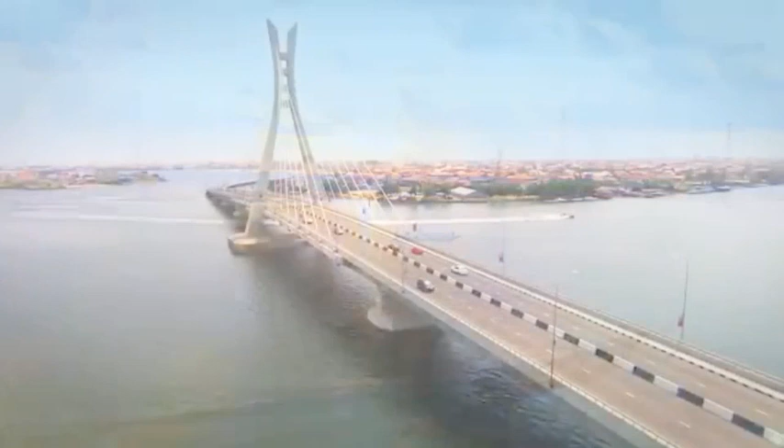The tropical hot city of Lagos is the largest city in Nigeria and sub-Saharan Africa. The city, with its 14 million people, is one of the fastest growing cities in the world and one of the most populous urban areas. Lagos is becoming a major financial sector in Africa and has one of the busiest seaports in the continent. It initially emerged as a port city that originated on a collection of islands.

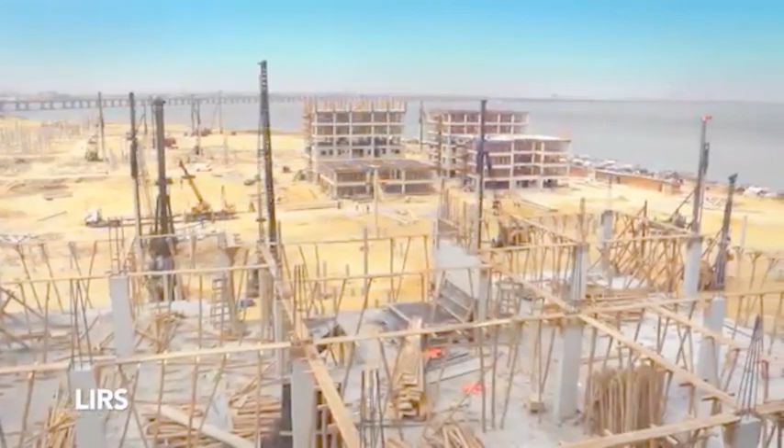Cities in Africa are predicted to see a high increase in their populations in the next few years, with Lagos on the forefront to hit record numbers. Nigeria's population is projected to double by 2050. Other predictions suggest this African city could be the most populated in the world by the end of the century, with Lagos' projected population by 2100 ranging from 61 million to an astounding 100 million.

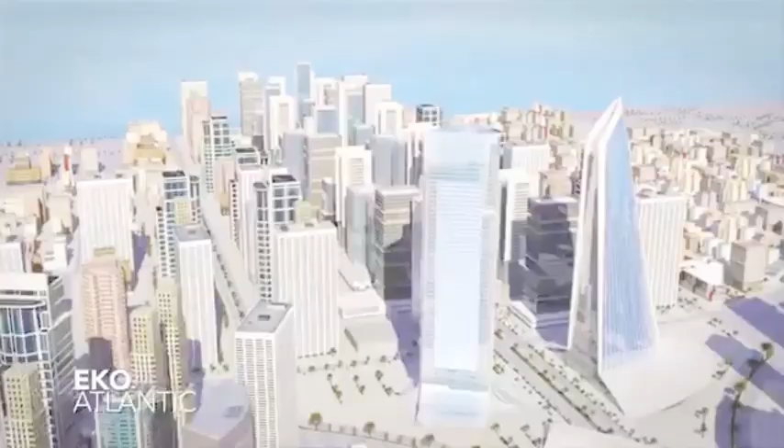Lagos is a massive attraction for migrants, with a population representing a heterogeneous mix of more than 250 ethnic groups from different parts of the country, which makes Lagos a dynamic melting pot. With its fast development and diversity, it's becoming a blend of social and creative entrepreneurism, which triggered a surge in cultural consumption and increased investments.

With the rapid urbanization increase, there is a high demand for housing and commercial spaces near the financial district in the Marina area.

The brief. The project brief should deliver and answer the question: how do we safeguard and deliver high levels of environmental quality in the context of increasing intensification of land use? The brief also states that a target of 800 people per hectare shall be met in the design process.

The tailored project has therefore been taken forward by displaying how we can manipulate the microclimate to maintain positive thermal comfort levels in Lagos to encourage pedestrians to use the space. The aim of this design is to provide high levels of environmental quality and comfortable environments for pedestrians and cyclists in Lagos through sustainable approaches to diminish the amount of carbon footprint in the area by manipulating the warm climate.

One of Lagos's main problems is its massive traffic situation, with a lot of people using cars to move from one place to another. The warm climate in the area doesn't enable people to walk or cycle outside. People in Lagos tend to not work and live in the same place, and that has a massive environmental repercussion.

Creating places where people can work and live at the same time, with all the different amenities only a few minutes away with good thermal comfort levels, would definitely encourage people to walk, cycle, or transit within the area. This project will demonstrate how mixed living in a highly intense urban area with a controlled microclimate is feasible.

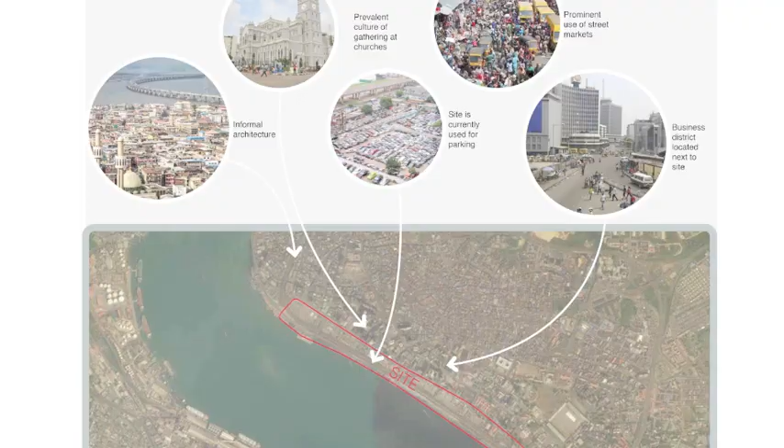The site. A seafront site has been selected next to the Lagos Island Marina stop. The Nigerian federal government has gone into a private-public partnership on what is called the Marina Quayside project. It hopes to replace 45 hectares of car parks with a transformative urban and waterfront development project intended to be a tourist center that will provide hotels, condominiums, commercial complexes, amongst many other facilities in the city.

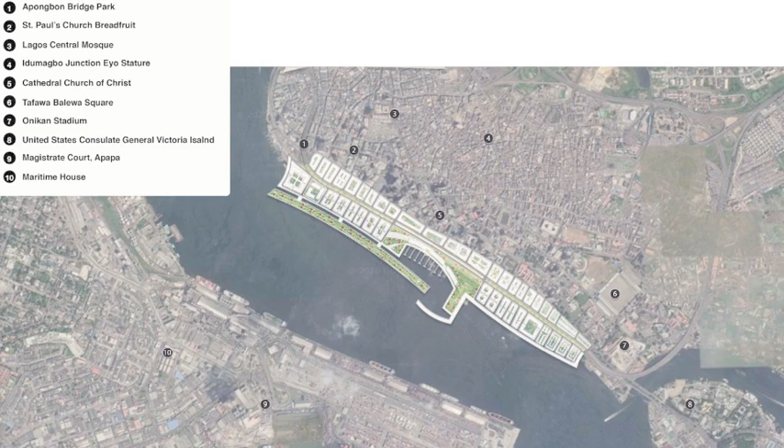The plan was to create a vibrant and beautiful waterfront development accessible to all. This will be achieved through the remodeling of the waterfront site to create a global strip that will absorb existing intensification processes while also encouraging interaction between different socioeconomic groups.

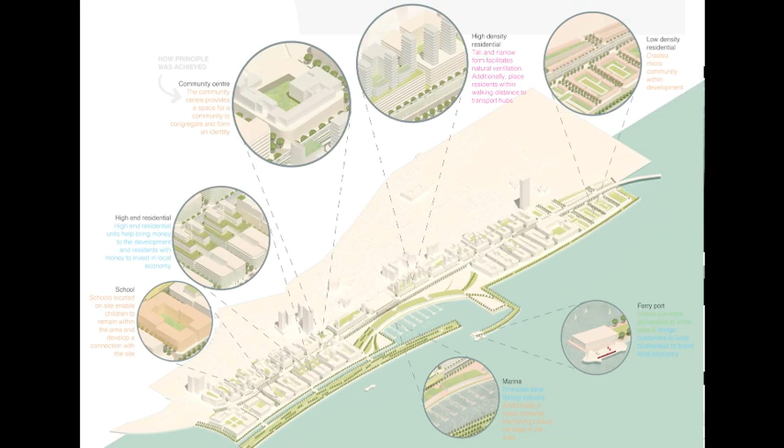The initial group master plan didn't fully achieve its microclimatic control goals and had a lot of problems. There were many initial challenges in the site, including the elevated motorway and train rail, which we had to design around and implement in our design project due to the expensive socioeconomic costs of removing it or implementing it underground.

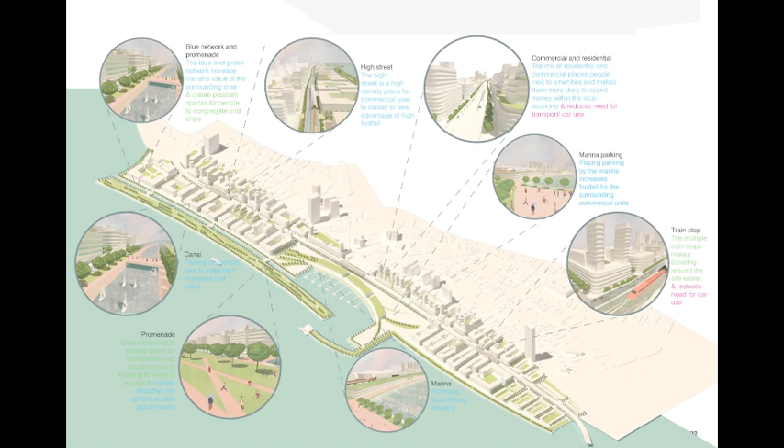For the refined brief, the solutions found in my specialization topic of controlling and maintaining good thermal comfort levels will at the same time resolve all of the above qualities.

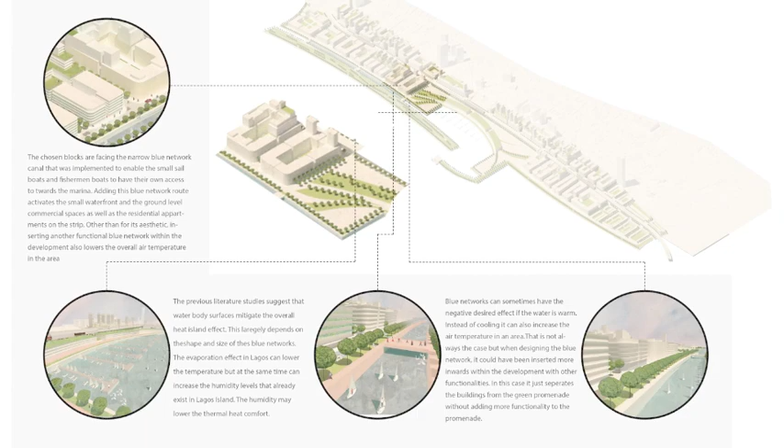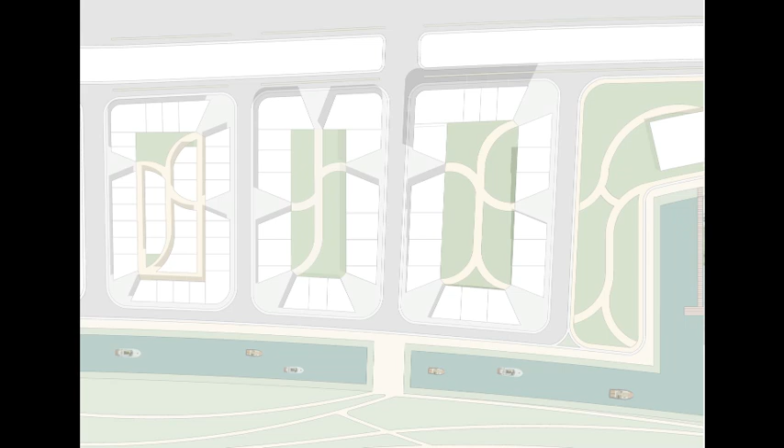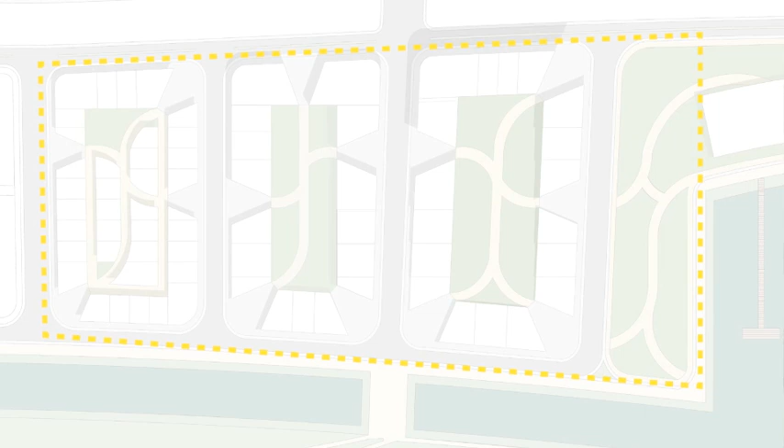The chosen site is the Marina area, which is the commercial capital of Lagos. The waterfront is a valuable piece of land which will be developed for commercial and housing purposes, creating employment and revenue for the area. It has also been selected due to its central location, proximity to the marina port, and its transportation proximity. The selected blocks didn't fully deliver these environmental qualities, with its massive green public space next to the marina, which wasn't functional and wasn't put into use.

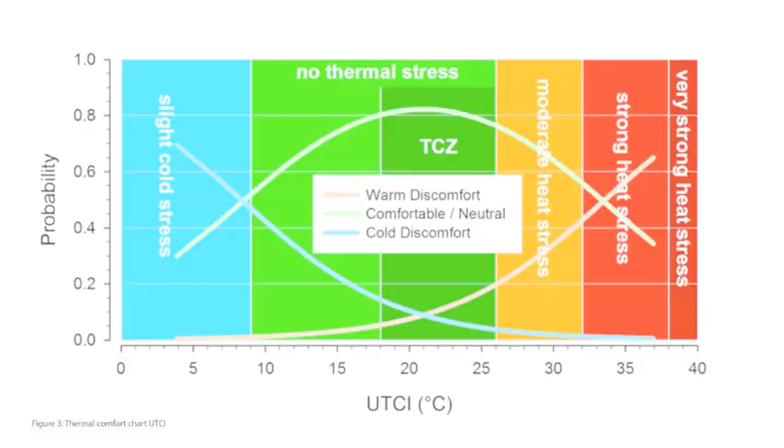Design process. The main goal of the thermal comfort levels is to encourage pedestrians and cyclists to use this space and diminish the overall CO2 consumption by controlling microclimates in the area. This is all linked to design processes such as climate control, accessibility, legibility, variety, mixed use, safety, environmental sustainability, and community.

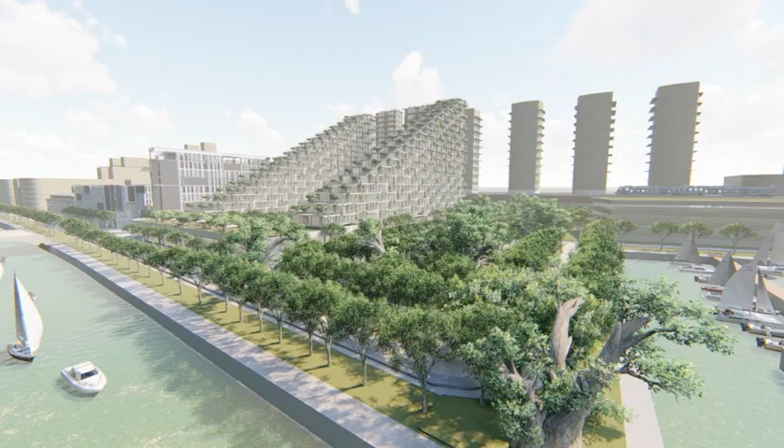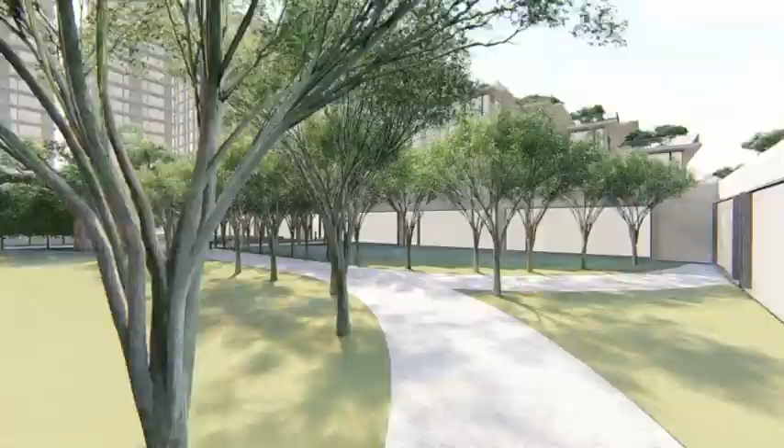The development incorporates a mix of uses and amenities to reduce the need for cars. It has an urban compact form with mid to high density ranging from 3 to 19 stories, increasing energy efficiency and reducing the required infrastructure per person.

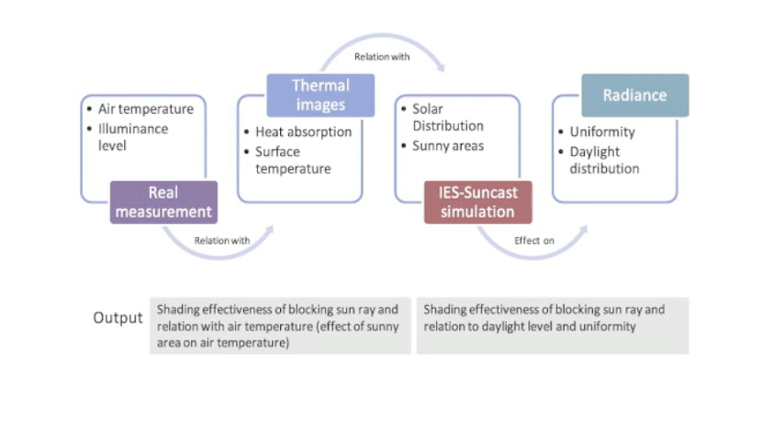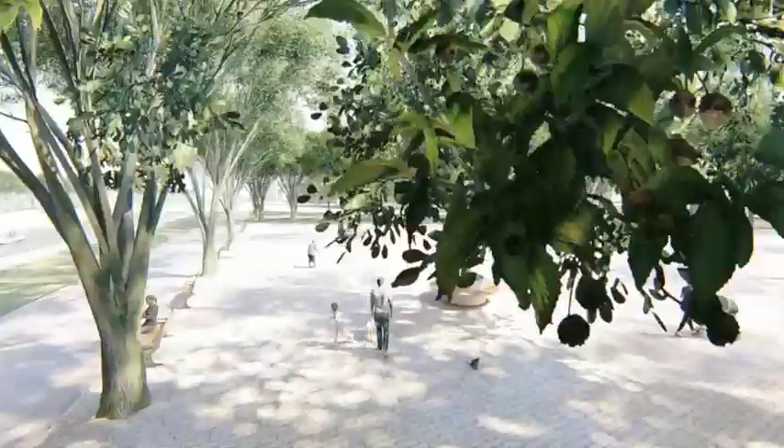Climate control. Many studies on thermal conditions in warm, humid cities like Lagos have been made in previous years. They showed how the thermal conditions are stressful for the public and that elevated temperatures lead to more heat stress, resulting in increased energy use such as air conditioning and CO2 fossil fuel emissions from cars.

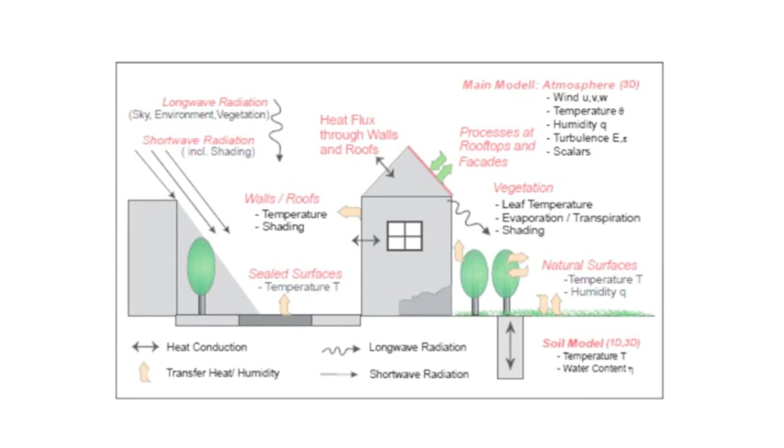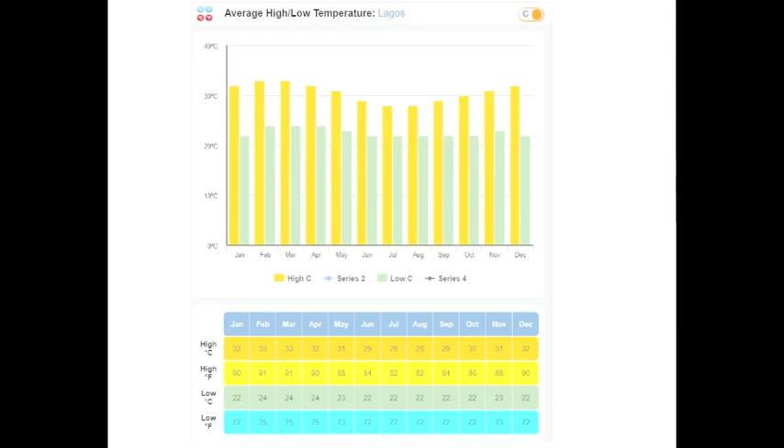Many public realm environments, especially in warm cities such as Lagos, are poorly designed, regulated, and not thermally comfortable. The temperature in Lagos can rise as high as 33 degrees, with an overall estimated average of 30.6 degrees Celsius, while the minimum lowest average is around 22.6 degrees Celsius.

Studies in warm countries with a similar climate to Lagos examined outdoor thermal comfort according to neutral, acceptable, and preferred temperatures where people felt comfortable outdoors in the park. The neutral temperature, when all respondents experienced neither heat nor cold stress, is estimated at 26.2 degrees Celsius. Acceptable temperatures, with only slight heat or cold stress, range between 21.6 and 31.6 degrees Celsius, and the preferred ideal temperature for all respondents is 24.2 degrees Celsius.

Therefore, the goal is to diminish the average 31 degrees Celsius figure to a comfortable level for pedestrians.

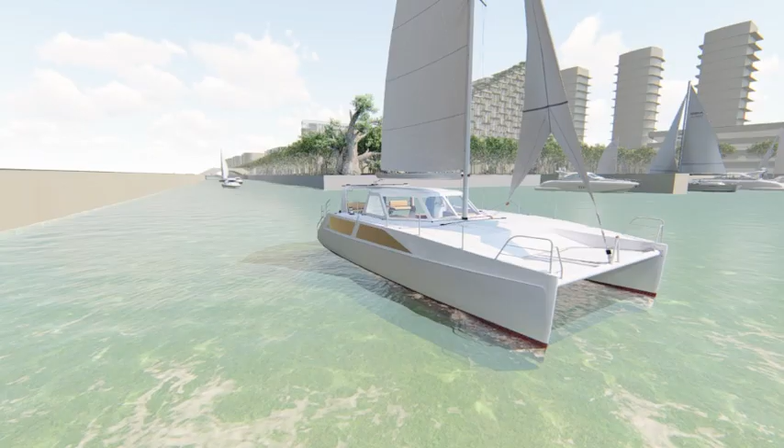Using vegetation and trees: field data shows that vegetation reduces the local temperature of surrounding air and surfaces, caused by evapotranspiration, low heat capacity, and the reduction of solar radiation. Vegetation extends this cooling effect during the nighttime when cool night winds and a clear sky are present.

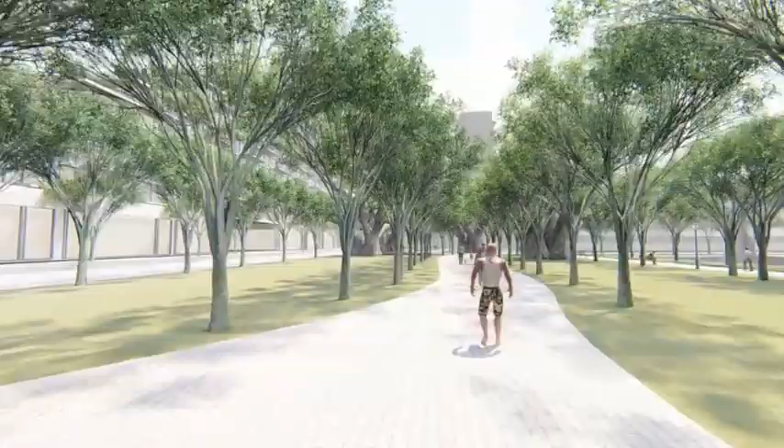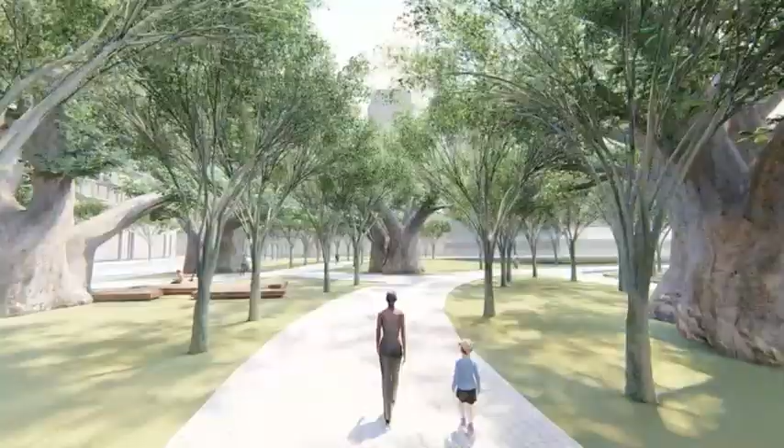Trees prevent solar radiation from reaching pedestrians. Shading from the tree canopy makes trees the most effective and efficient vegetation approach for cooling. A tree's canopy acts like a parasol, blocking out up to 90% of the sun's radiation and increasing the amount of heat we lose to our surroundings by cooling the ground beneath us.

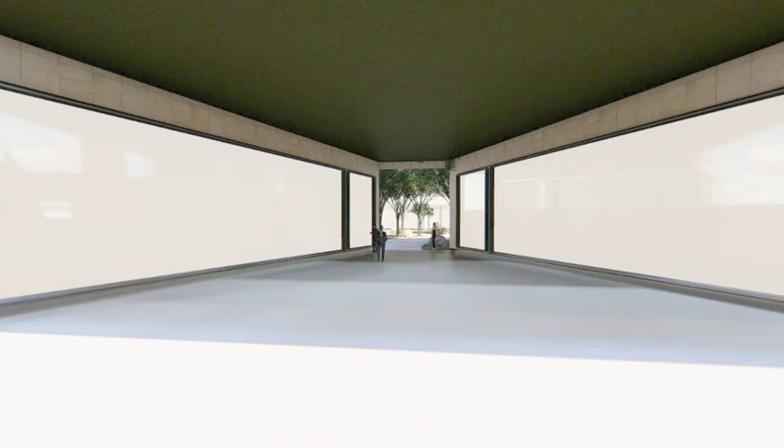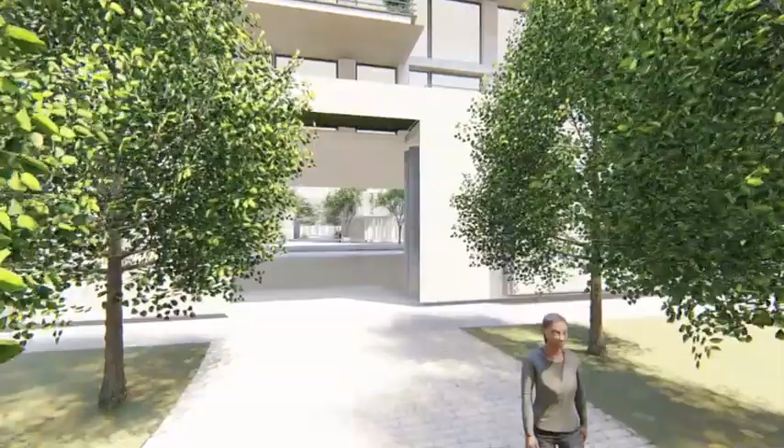The shade provided by trees can reduce our physiologically equivalent temperature by a minimum of 7 degrees Celsius, and sometimes as much as 15 degrees Celsius depending on latitude. This can reduce the overall average temperature for users from 31 to 24 degrees Celsius, an ideal temperature for all respondents. The trees shall be planted throughout all the public pathways on the master plan.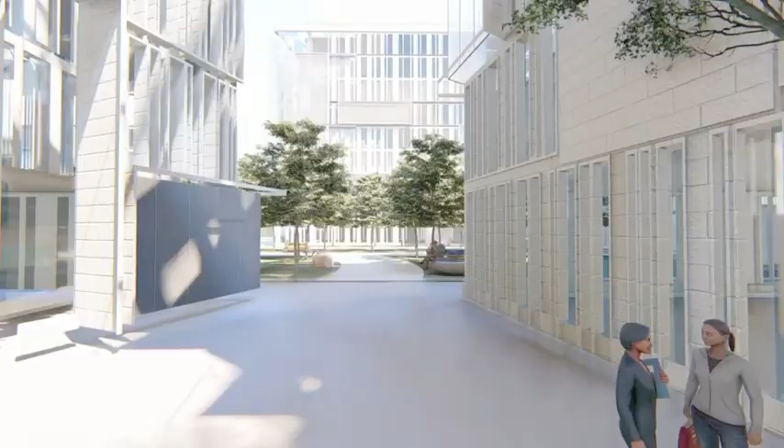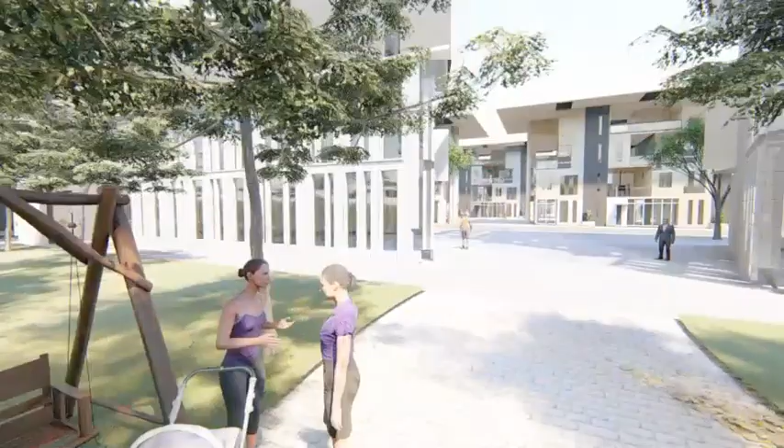Green roofs and green open spaces: these will not provide shade for pedestrians unless trees are included. Green walls and facades can provide shade if grown over artificial structures. Large green spaces help maintain and reduce the urban heat island effect and reduce artificial cooling. The tallest buildings will also include green roofs and walls to control internal and external temperature.

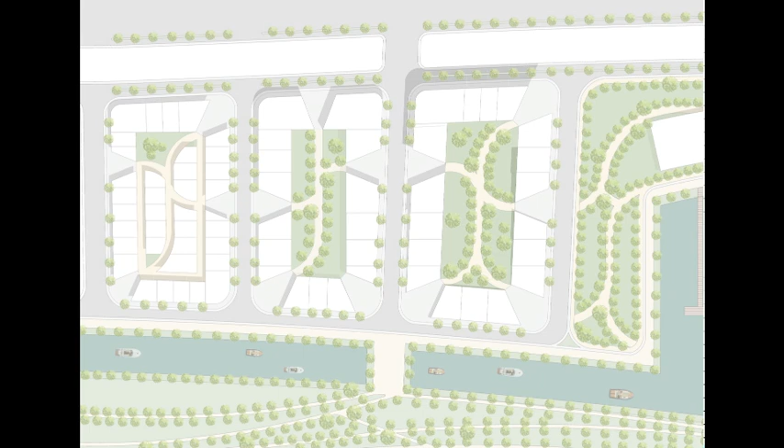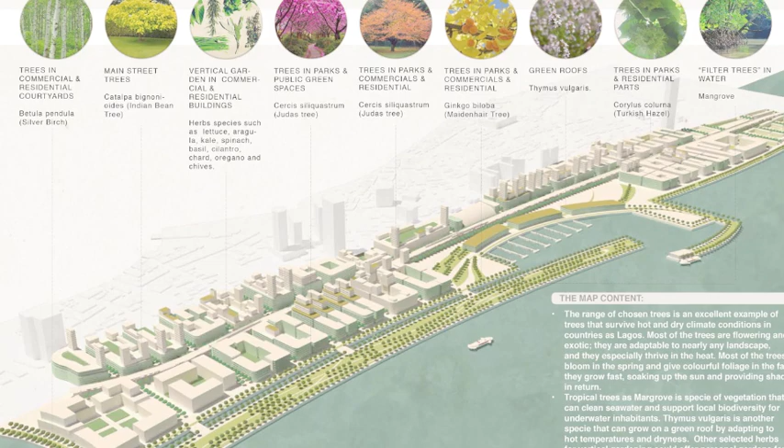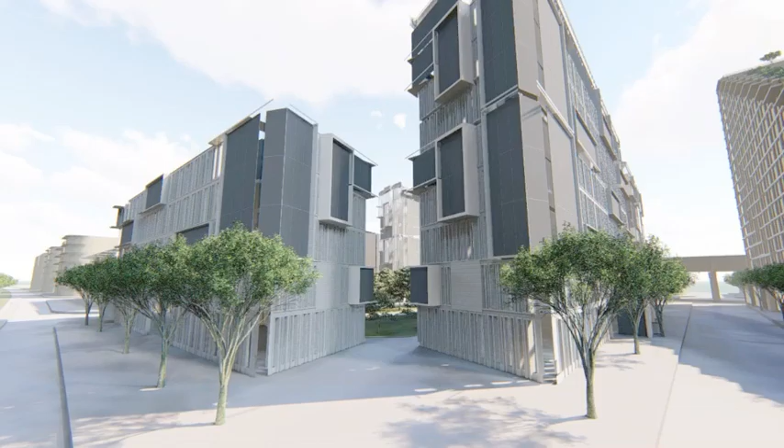Courtyards: main shared public courtyards with vegetation have also been used to help reduce the overall urban heat island effect within the perimeter blocks.

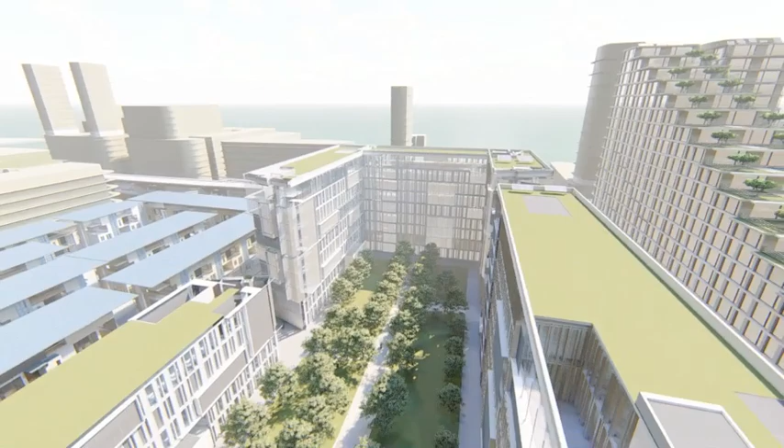Wind. The street blocks have been designed to trap the southwest prevailing winds inside the perimeter blocks within the courtyards. The building design also enables natural ventilation throughout all the dwellings.

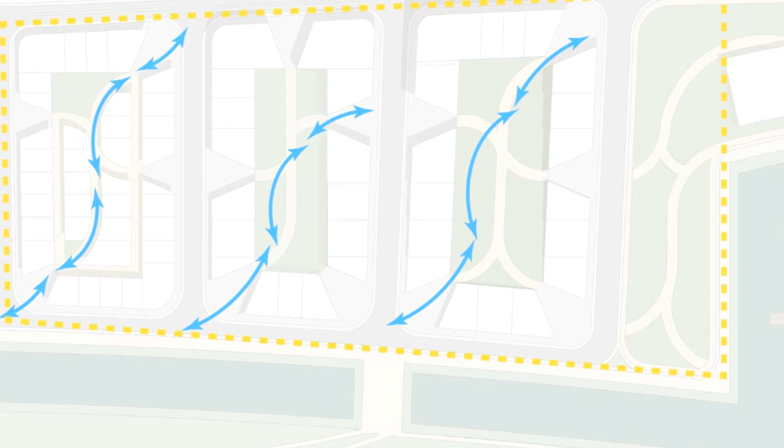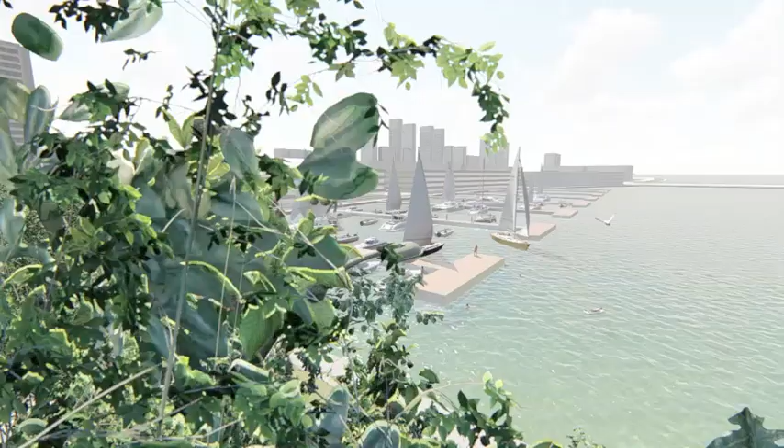Blue network. Blue networks in urban environments have the capacity to have less daily and annual temperature changes. This stabilizes and restrains thermal circumstances in areas near the sea, where shore breezes substitute the hot air over land and cool down land heated by solar radiation during daylight. This has been implemented by having a fisherman canal blue network within the development, connecting the marina to the neighboring islands while creating beautiful views for the residential and commercial leisure facilities.

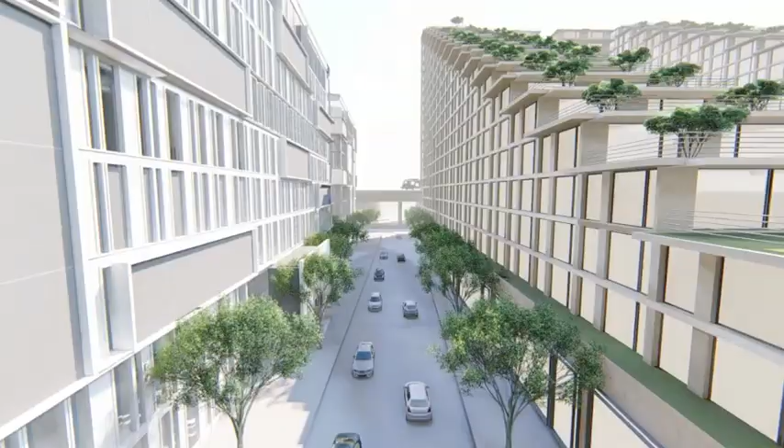Street width. The target is narrow streets with a high building height to street width ratio to provide shade. Wide open streets are exposed to greater amounts of solar radiation, leading to higher daytime heat stress.

Street orientation. The target is north-south oriented streets. East-west oriented streets are exposed to more solar radiation during the day compared to north-south oriented streets, where some building shading occurs in the morning and afternoon.

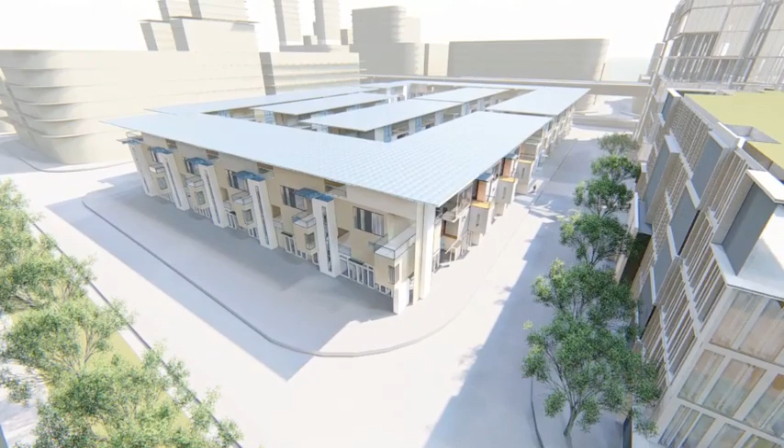Solar canopies have been implemented where necessary, such as in the low-rise single-family and commercial units, where solar panels will harvest more energy and provide shade to users. It has also been used in the vertical garden in residential buildings as a pergola to capture sunlight and provide shade within the vertical gardens.

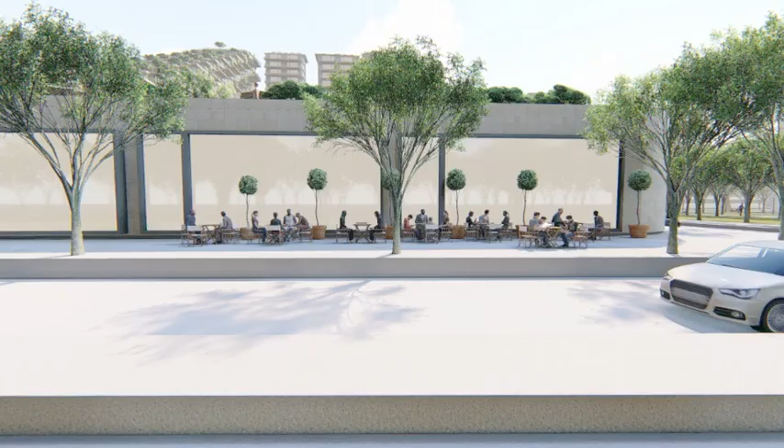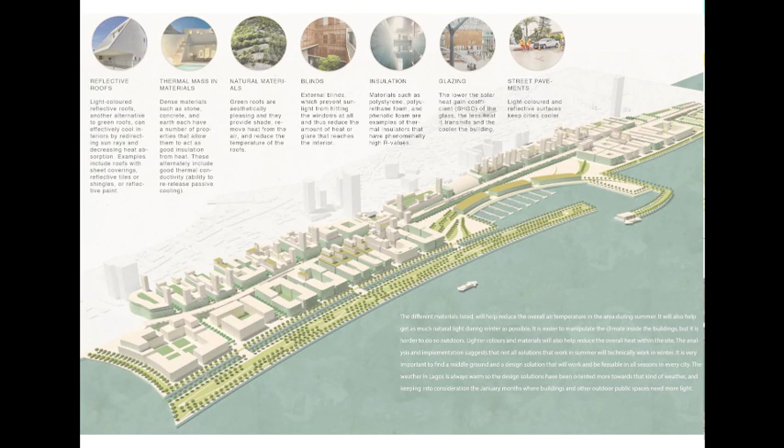Materiality. The use of light-colored materials and other design techniques reduces the overall urban heat island effect internally and externally using an urban albedo approach. The map displays all the different approaches used on site, such as reflective roofs, natural green materials, blinds, insulation, low SHGC coefficient for glazing, and light-colored street pavements.

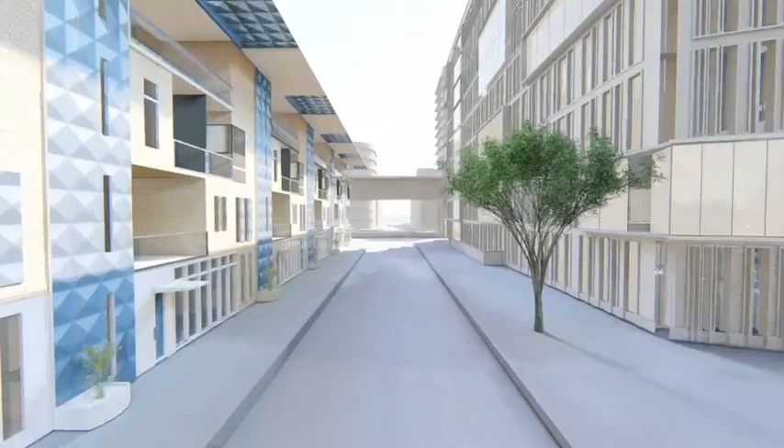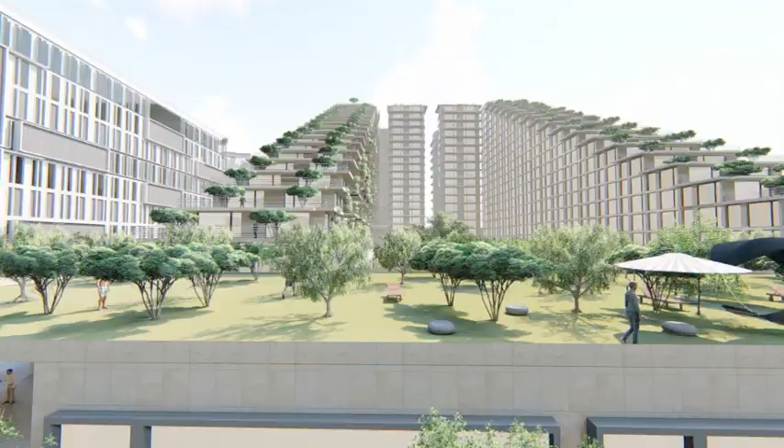Building heights. Taller buildings have been placed in the north to minimize overshadowing near the ocean front while not blocking ocean views from other buildings on site. The tallest buildings were also placed on the high street facing the elevated bridge, as that is the widest street on site and needs the most shadowing. Urban breaks of 4 meters and 1 story also allow for wind ventilation throughout the buildings.

Streetscape Framework Study. A chart framework developed by Norton. Their research on planning for cooler cities classified streets into varying levels of priority for street tree implementation. This table was developed with the aim of reducing street surface temperatures during the summer solstice in warm cities.

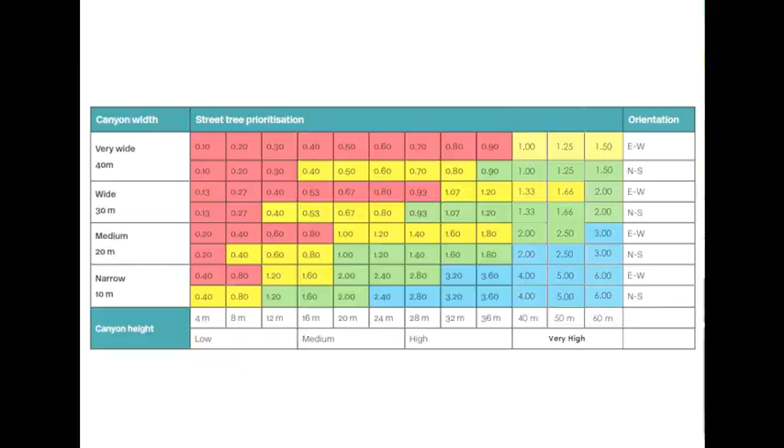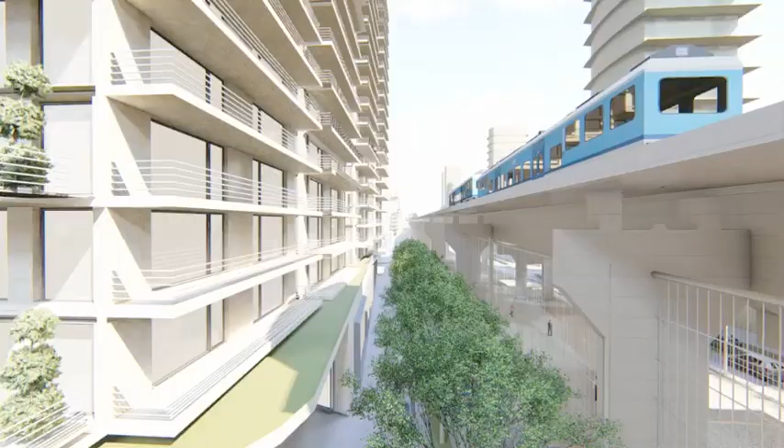I have changed the framework chart and adapted it to the layout and street heights that exist in my development. The table identifies which streets should be prioritized for street trees based on the street orientation, for example east-west or north-south, the width of the street, and the height of the buildings abutting the street. The ratio of building heights to street width is known as the height to width ratio.

Those zones marked red are of higher priority for street tree planting, as they are exposed to high amounts of solar radiation, so tree shading is most needed. Those zones marked green and blue are less of a priority, as buildings along the street provide shade.

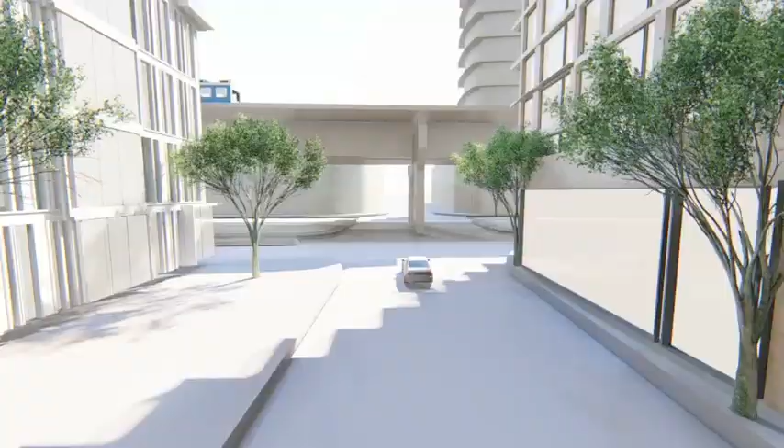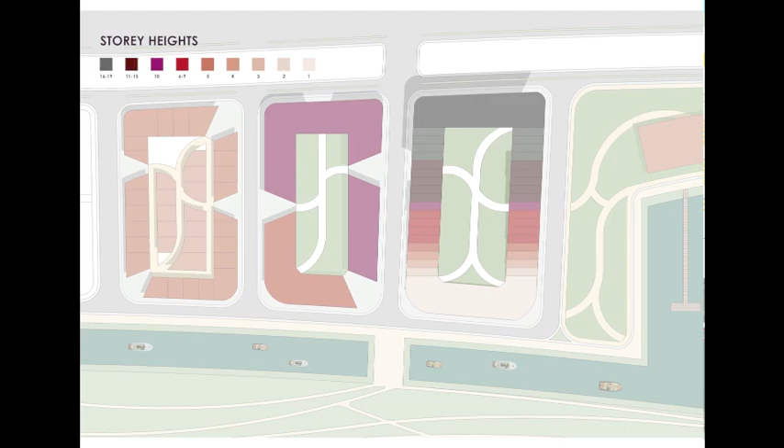The first street with the vertical high-rise residential gardens has a gradual increase in floor height as displayed on the map, so the need for trees depends on the exact location within the street. The street is 20 meters wide with an increasing canyon height from 8 meters to 60 meters at the end of the street. In the beginning of the block, it scores a low 0.40 points, with an imperative need of trees on the east-west orientation.

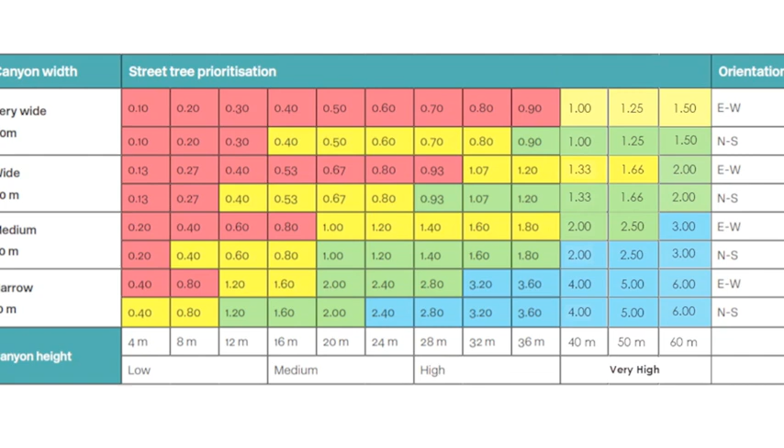Only when reaching a 40-meter high canyon does it score a green 2.0 points and doesn't need much trees. As for the north-south orientation, it scores a positive 1.0 starting from a 20-meter canyon height.

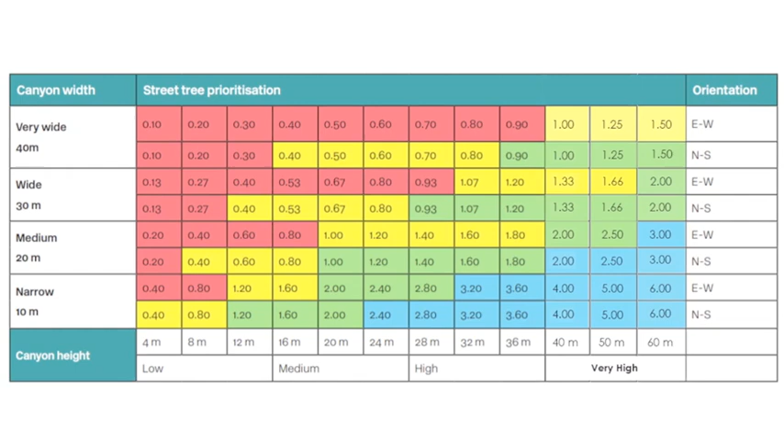The second street is also a medium-sized 20-meter road but with canyon heights on both sides. It scores a similar result with the similar building height that gradually increases. It does need trees in the beginning of the street, but creates enough shade throughout with a green 1.0, and the other office residential building scoring a positive green 1.6 points, making the street very well shaded with good thermal comfort levels.

The third street has a 17-meter width with a much lower height canyon in the beginning of the street.

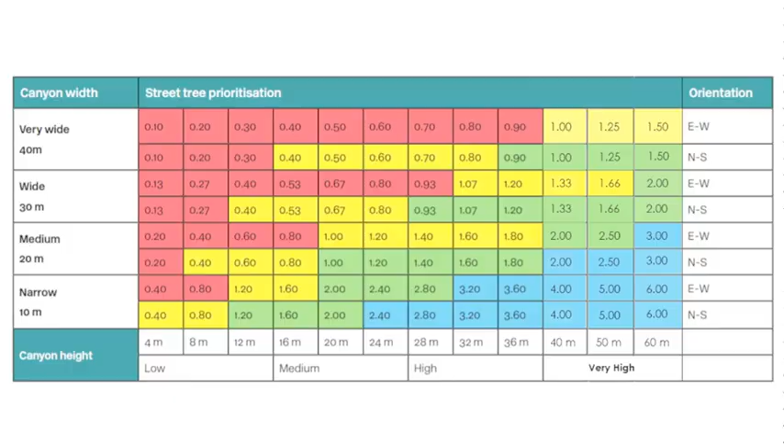The office residential building has a 16-meter height scoring an average yellow 0.9 score, which still needs some trees. Afterwards, the height changes to 36 meters, which projects enough shade to the whole street and has a positive blue score of 2.1. The low-density, low-rise block scores a perfect score with their solar panel canopies that provide shade to the whole block and doesn't need any vegetation.

As for inside the perimeter blocks, the pathways all use vegetation and trees to provide shade for the users and encourage them to move from one place to another.

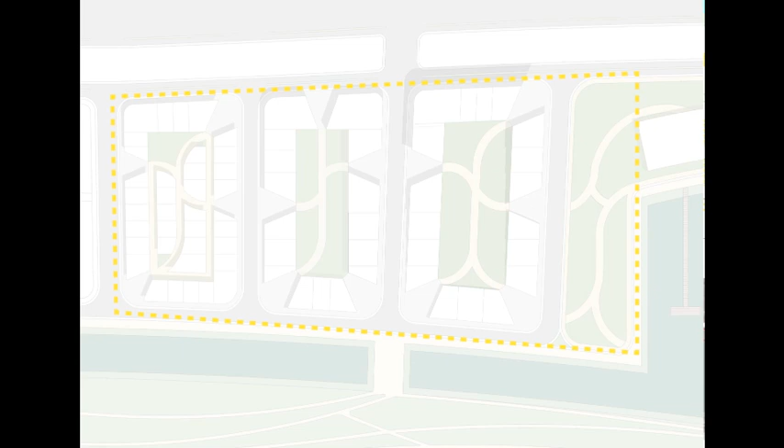The map shows the street hierarchy and has been designed to enable a good level of permeability while at the same time reduce the number of cars used within the blocks. Eco-friendly permeability has been implemented to minimize the use of cars within the development.

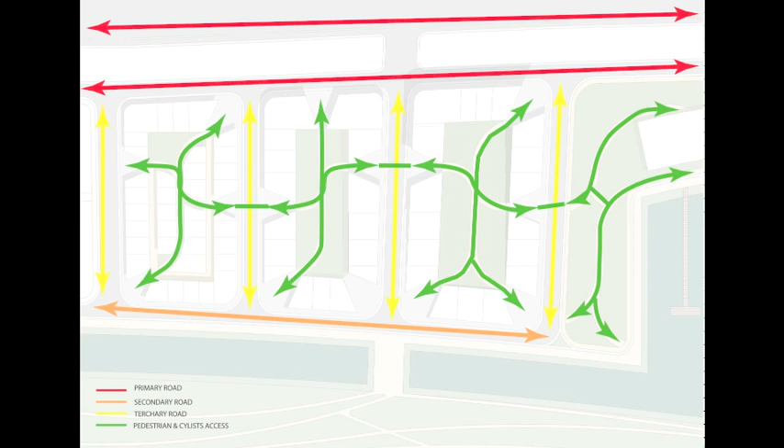The main Marina Road with the High Line Bridge is the busiest, and that is why medium streets have been designed throughout the Marina streets to limit and filter the amount of cars that enter and have access to the oceanfront street. On the other hand, access within the blocks is only possible by walking and cycling.

Different parking access points have been placed within different areas of the blocks and buildings with massive two-floor underground parkings underneath each block, which is used for the residents and services for the different commercial shops.

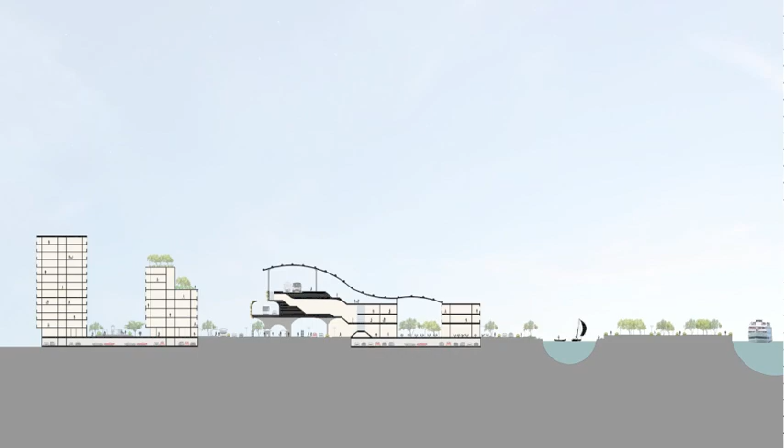Creating a landmark through the marina, the vertical garden residences have also been designed as landmarks and as the central core of the development, which are visible from afar and creates a sense of legibility and identity to the area.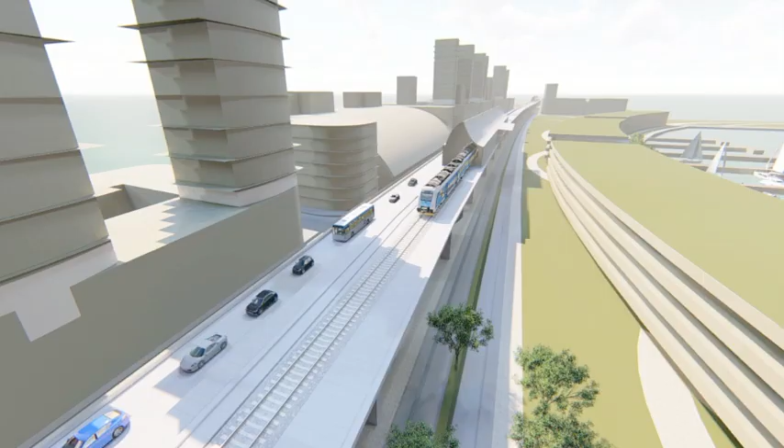Side transport connection: the area has also been designed to maximize the public and all social groups' ability to access the site and use the different commercial and leisure shops, by designing the development close to the marina station and designing a ferry point that connects to the different lagoons and islands.

This will increase the amount of people that access the site and use the amenities, as well as the number of commuters that will be arriving without the use of a car.

Building heights: varying roof heights creates character and identity unique to the city. Lagos's financial district, which is linked to the site, ranges in high and low-rise buildings, creating a varied skyline that matches the marina development. Apartments, studios, and duplexes with hanging gardens and single-family houses are mixed around the site to create a variety of dwellings.

There are different block characteristics, such as the vertical garden residential building, which is the densest part of the development and proposes elevated private gardens for the users within their blocks.

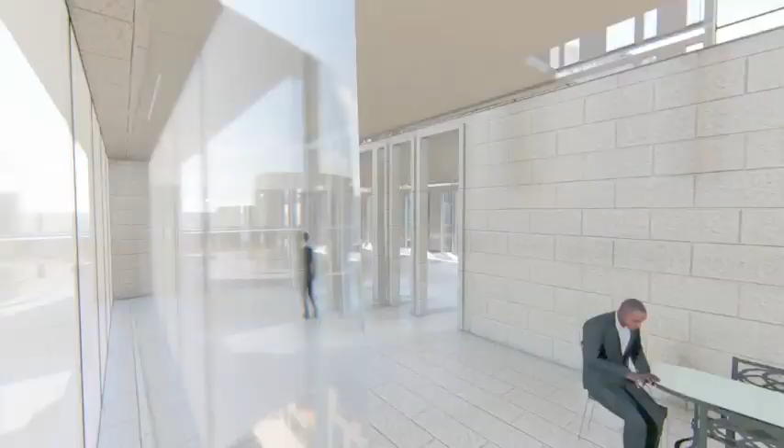The second block, which uses perforated solar panels to diminish the amount of sun that goes through the glazing, is more compact with mid-size heights and incorporates office spaces and commercial units on the ground floor.

The third block includes 3-story single house units for bigger families and for a more souk market feel on the ground floor, where people can interact, do business, and socialize in the market.

The plots have a fine-grained feel with different layouts, materiality, and character, which creates a sense of change and variety. The overall vision of the area, with its different typologies and characteristics, creates variety, diversity, and dense urban living while ensuring activated sheltered spaces for pedestrians.

Mixed use: creating a spatial flow from public to less public spaces by implementing shops, cafes, restaurants, and other mixed-use amenities. The people in Nigeria like to have their own private space, and that is why there are no residential units on the ground floor, and why there are commercial shops at ground level connected to the underground parking for services.

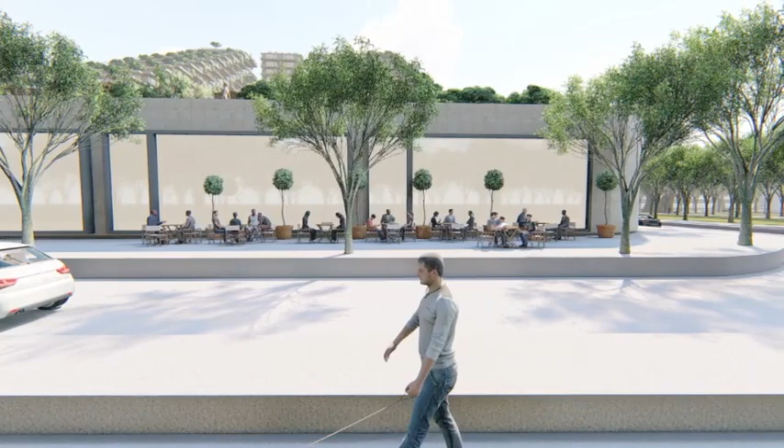Creating a live-work environment by placing office spaces in the second middle block, existing within the second and fourth floors, to encourage people to work within the development and at the same time attract more commuters who can use the commercial shops on the ground levels.

Safety. Promoting a sense of safety is of paramount importance as it encourages people to go outside and is an essential element in urban design.

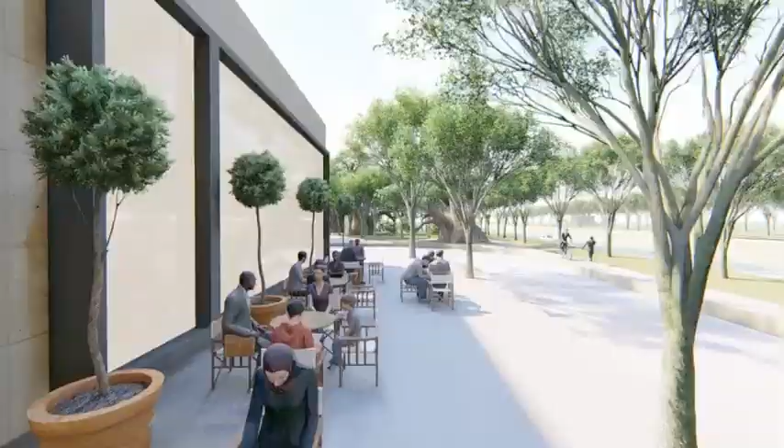All streets have active edges, as do most courtyards, to provide active surveillance. Active frontages, fronts to fronts, backs to backs, increase natural surveillance and positive streetscape characteristics. Shaded terraces and balconies are introduced throughout the block structure with big windows and perforated louvers, enabling users to diminish temperature and direct sun effect while still allowing residents to look outside onto the streets.

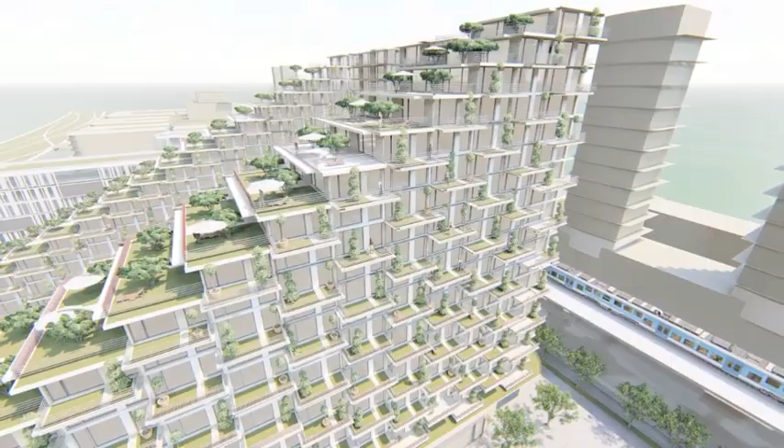Environmental sustainability. Design actions here include recycling trash drops in every building via the underground servicing network, recycled water used to irrigate the green vertical gardens, and solar panels providing more solar energy to the overall blocks, placed on top of every building and every balcony or terrace pergola.

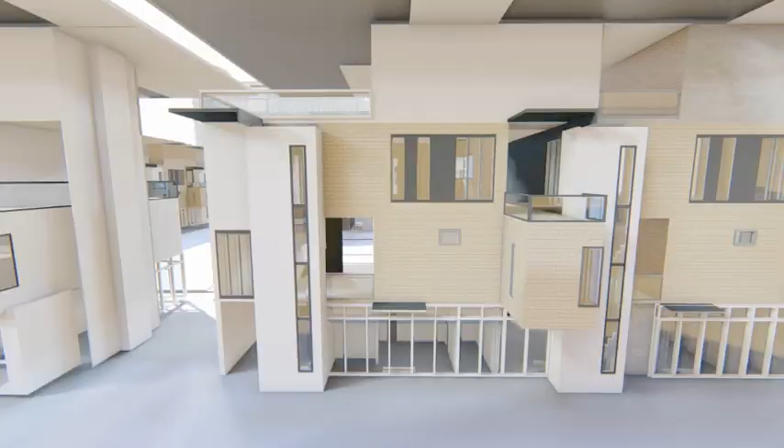Trees are used as vegetation barriers from the main high streets and the High Line Bridge to reduce noise pollution from the area. Passive cooling systems such as cross ventilation and louvers enable the flow of wind throughout the blocks to reduce the need for ventilation.

Community. Creating a welcoming public realm for all societal groups. All public spaces should have a human scale. The blocks average around 65 by 120 to still enable a human scale experience with an inclusive environment, sustaining residential demand in the area to achieve 800 people per hectare and creating new businesses and office spaces.

It has been designed for connectivity and to encourage walkability. Social cohesion for all religions and tribes is of paramount importance, creating spaces for different purposes available to all ages. That's why cafes and restaurants have been placed in front of the waterfront blue network for people to use.

Areas for public activities are introduced, such as interactive art and street performers. The different blocks also connect to the cultural green promenade designed on the other side. Street furniture is strategically placed and designed to encourage communication, with benches placed to face pedestrian flow.

Encouraging the fishermen culture in the area, enabling them to sell their stocks in the marina markets. Embracing the powerful market culture in Lagos by creating a souk-like block with narrow streets and shops on every active front at ground level.

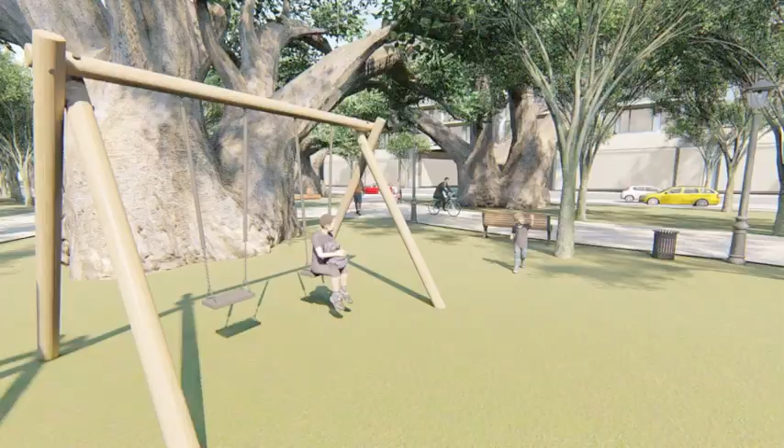Children's play areas are placed away from city traffic, close to the marina park. Sports under the bridge activities cater to older, more responsible people, proposing many sports in a secure, shaded environment for everyone to use.

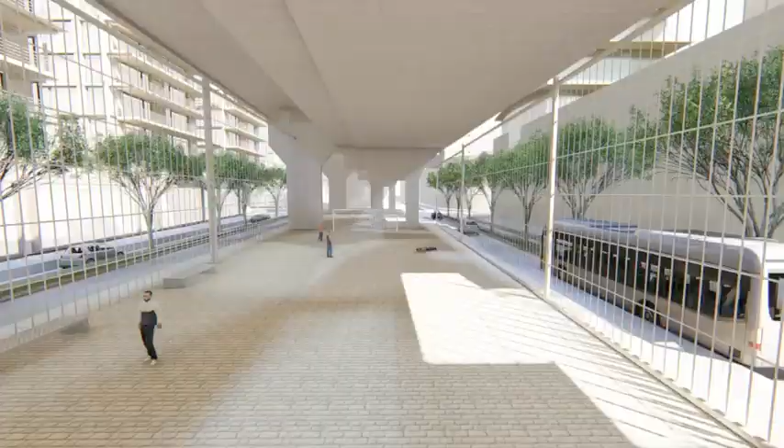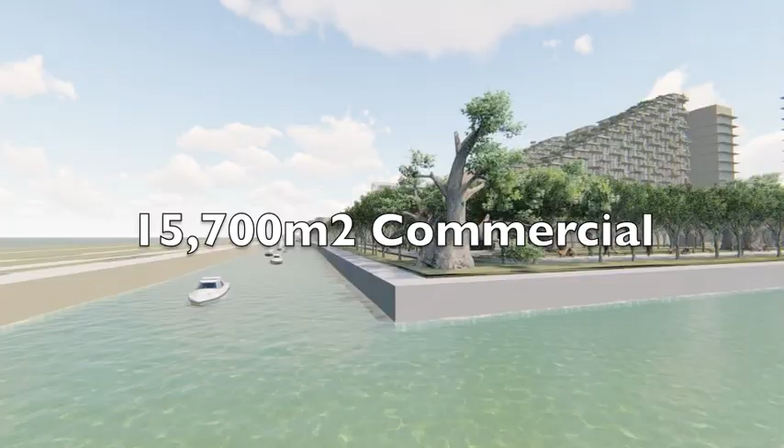In general, the intensified area has a resident population density of 800 people per hectare, 80,000 square meters residential, 15,700 square meters of commercial space, and 11,000 square meters of office space. This fits with the master plan requirements.

The master plan development is highly inclusive, proposing distinctive sustainable blocks that encourage people to walk throughout the site. It does an excellent job analyzing the different thermal comfort levels throughout the main streets within the site to improve thermal comfort in the future, showing natural and sustainable design solutions appropriate to the Lagos site.

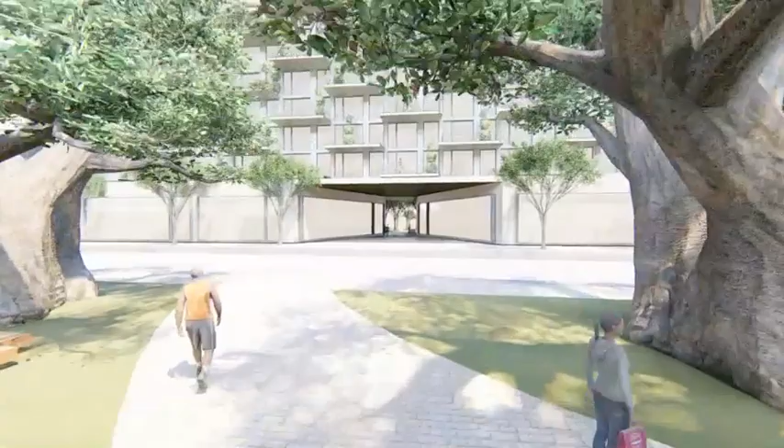The development also proposes variety in dwellings and other facilities while respecting basic urban design qualities. The overall project shows the effects of intensification on the area while keeping a degree of inclusivity and social cohesion for all the different groups, while at the same time taking a sustainable approach to controlling the microclimate in the area.

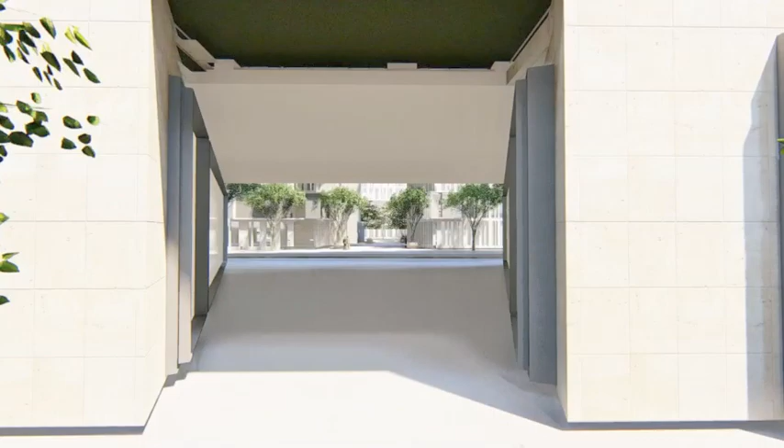It is clear that a lot of data regarding preferred thermal comfort figures for each city's warm climate needs to be more accurate. The lack of precise data and information about Lagos online makes people look for similar countries with similar profiles, which are then applied to the site. Maybe in the future more designers and urban planners will have access to these precise numbers about the area, which would definitely enhance the framework study.

Another thing I wish the development could include is more unique plot designs other than perimeter blocks, and perhaps more diverse typologies in its blocks.

To conclude, future planners and designers should take into consideration these microclimate solutions in warm cities to reduce overall CO2 emissions. African cities are growing at a very fast pace and need to adapt and transition towards more sustainable developments for a better future.